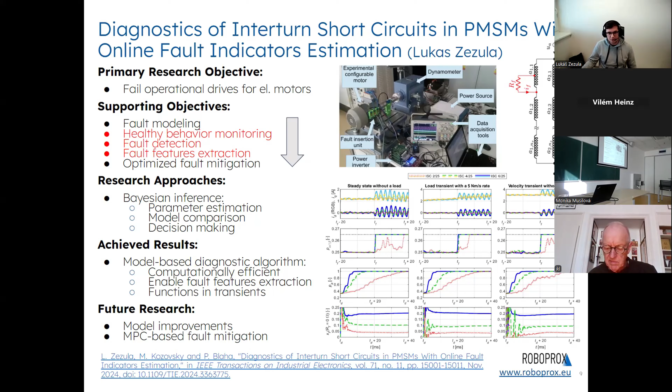We are estimating in steady state, load transient, and velocity transient. For future research, we plan to improve the model by, for example, incorporating higher harmonics of permanent magnet fluxes and so on.

We plan to design model predictive control based fault mitigation methods to optimize the control actions. Thank you for your attention.

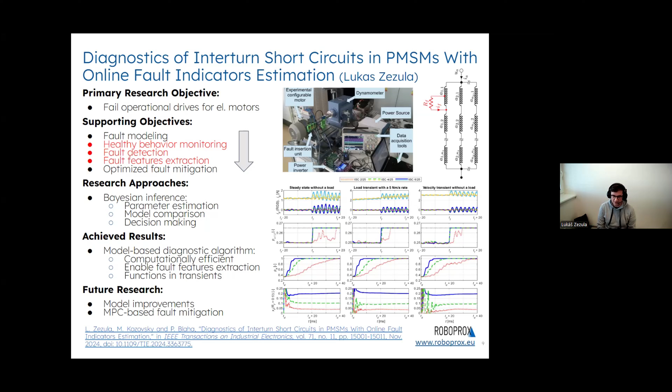Hello everyone, and welcome to my short presentation. My research is into the design of algorithms for non-collocated vibration absorption.

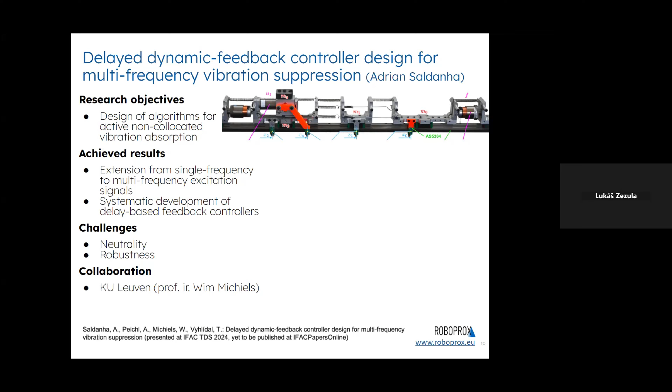What we mean by that is basically that the actuator is not directly attached to the target at which the vibrations are to be suppressed. Additionally, in this research, we also expand our current methodology to include multi-frequency absorption.

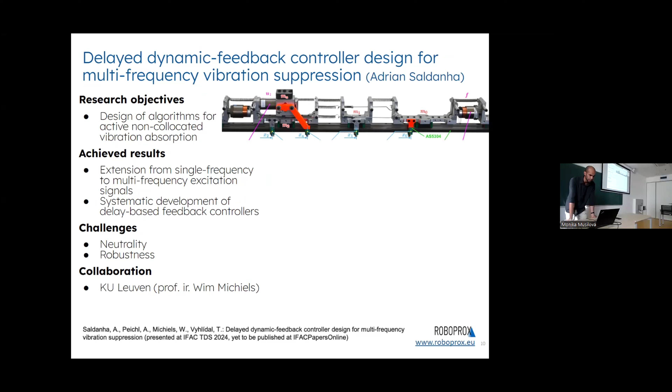How we achieve that is by using delays in our control design. We take into account minimum state information, and we feed that into a delay-based controller. Additionally, we also use a dynamic controller, which further complicates our design.

But because we have the tools available, and we systematically design our system, we are able to compensate for at least 4 frequencies as a benchmark case.

So far, we've achieved a proof of concept of this design. Despite that, we still have a few additional challenges. The first is to account for system neutrality, which is when we use acceleration feedback. The second is to improve the robustness of our controller.

Another thing to mention is that we collaborate with KU Leuven, with my professor Wim Michiels, as part of this project. Lastly, just to showcase what we mean by this.

Basically, we have an absorber located at U1 over here, and we wish to silence vibrations at the mass M1. So we tune the control action using delayed feedback from the masses M2 and MA to target the vibrations at this mass. The external disturbance that we consider is from this disturbance, which is from a voice coil.

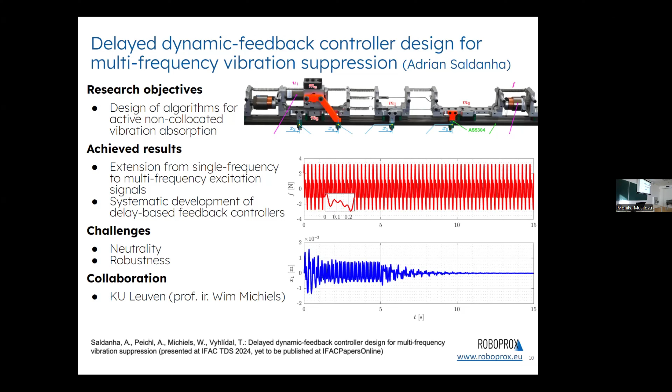Good afternoon, everyone. I'm excited to share our recent work on feedback control for lattice structures, specifically focusing on a physical model we call the voxel tower.

Our work is motivated by the concept of digital or modular materials, where structures such as this one are built from discrete building blocks. Previous research on these materials showed that they are excellent for creating lightweight and reconfigurable structures, but they often lacked feedback control, meaning they couldn't respond to changes in real time. We aim to solve this by introducing feedback control for improved dynamic behavior.

First, actuated voxels - these are building blocks capable of local movement, allowing us to control the shape and behavior of the entire structure. Second, data-driven control: we use a method called dynamic mode decomposition, which helps us build a model of the system using only data, so we don't need prior knowledge of the structure's dynamics. Third, control methods: we implemented two control strategies, linear quadratic regulator for stabilizing the system, and Koopman model predictive control for tracking a set or desired path.

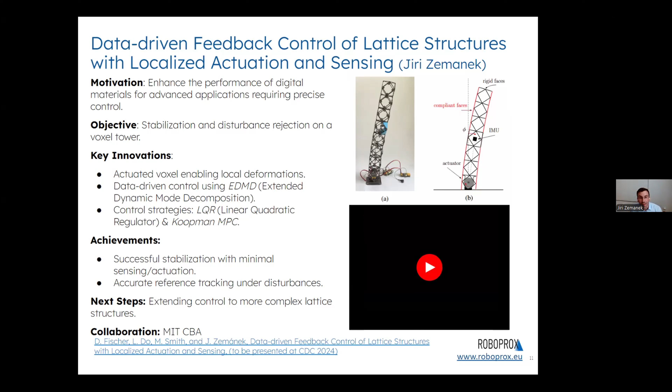It can accurately follow a set path, which is a significant improvement over older systems that lacked feedback, showing that digital materials can be used in dynamic, responsive systems.

Next, we plan to apply our method to larger and more complex structures, testing how well we can control bigger systems while keeping them resource efficient. I should mention that this work is in collaboration with the Center for Bits and Atoms at MIT, and we are exploring further real-world applications.

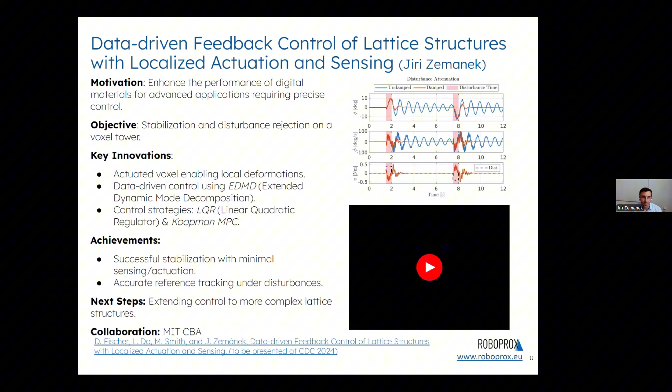Good afternoon, everyone. I will present the next research project, and this project is focused on automatic conversion of point clouds into building information models. First, let me start with what are actually building information models.

These models serve as a digital repository, and inside this repository we have a building, and each object is represented with its geometrical entity, and we can assign properties to each element.

These models are useful in different parts of a building lifecycle. We can use them in the construction phase. Also, we can use them at the end of the lifecycle, and they help us evaluate the process and maintain the building.

Some older buildings don't have these models, so we are trying to recreate them with laser scanning techniques. We are doing it nowadays manually, but we have developed a pipeline that can automate this process and save time. We have combined the density-based analysis method with computer vision techniques and morphological operations.

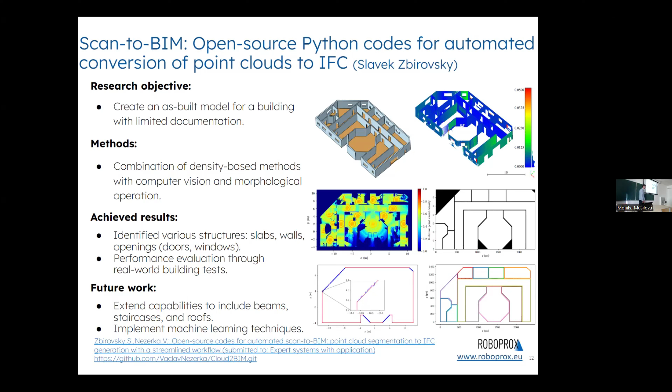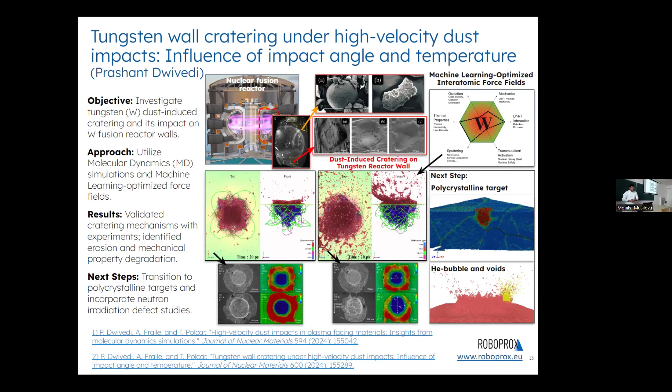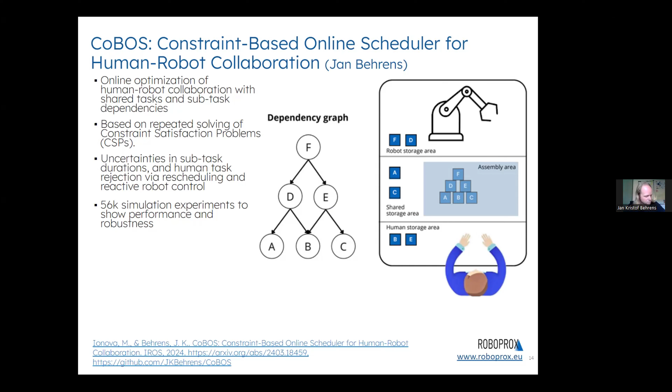CoBOS, our system, is based on constraint programming. It takes in the structure to be built, shown on the top right, the observation from the environment, and the list of agents, and encodes this as a constraint satisfaction problem to calculate a solution. Then it requests actions from the actors, here the robot on the left via behavior tree, or from the user via a graphical user interface.

So why do we care about online planning? The reason is that in human-robot collaboration there is a high amount of uncertainty, and the human can reject certain tasks. So we need to close the loop, which gives us the chance to balance the loads and reschedule the rejected tasks.

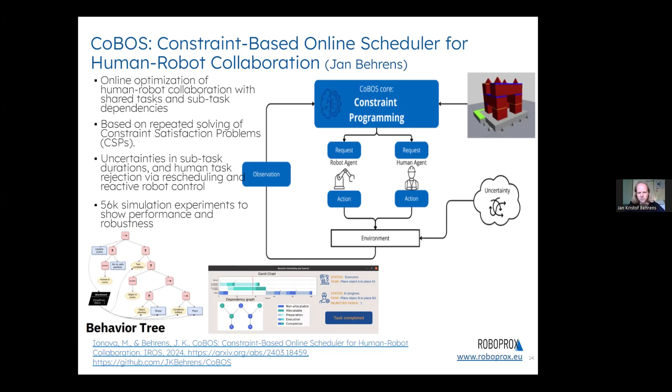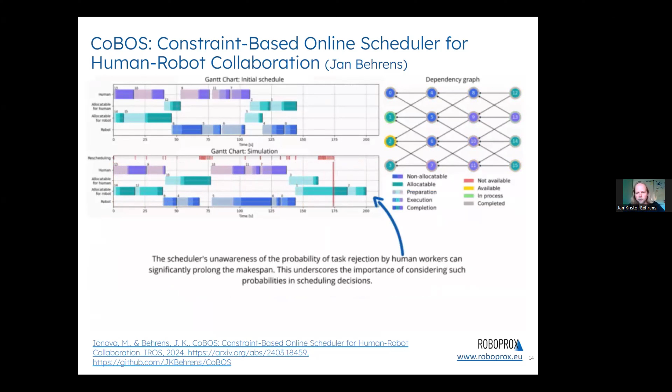Here you see on top the initial schedule, how the system schedules with the initial assumptions, and on the bottom the Gantt charts, where the top two rows are for the human and the bottom two rows are for the robot tasks. The bottom Gantt chart shows how the schedule evolves over time with more observations, and of course it gets longer. On the right you see a dependency graph showing the live observations of which tasks are currently available, which are already done, and which are not yet available.

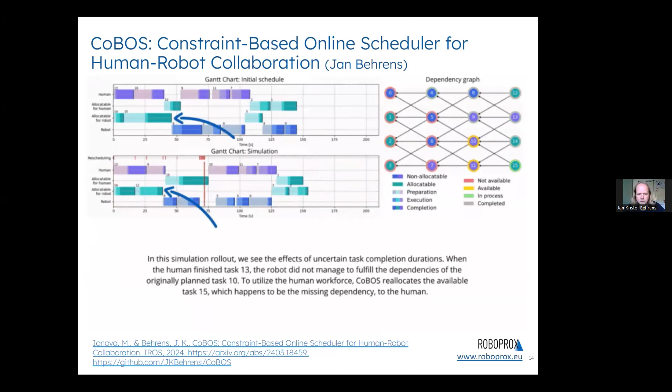The reactive robot control using behavior trees and impedance control allows the robot to react online to disturbances, for example the motion of the platform, or when the human enters the workspace, so that the tasks can be fulfilled efficiently and safely.

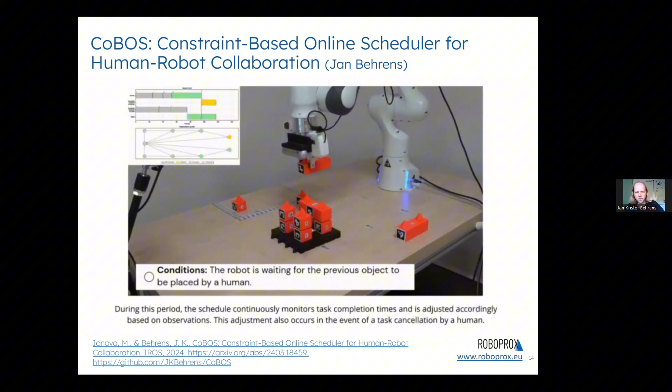So we executed 56,000 simulation experiments where we sampled from distributions for all uncontrollable variables. And we found that our scheduling approach, our online scheduling approach, outperforms the other baseline methods and methods from the literature, and exhibits a lower makespan on average and also a lower variance.